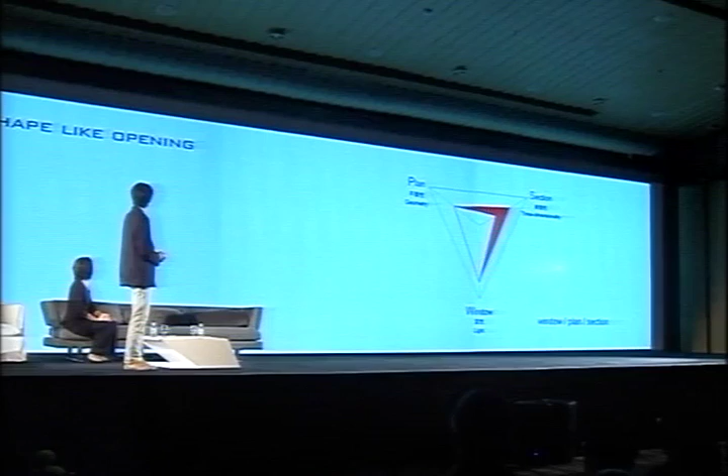And the second method, second strategy we are approaching, is how can we put the window as an architecture. Plan and section, we designed separately, but we would like to think of them at the same time. Plan and section and window.

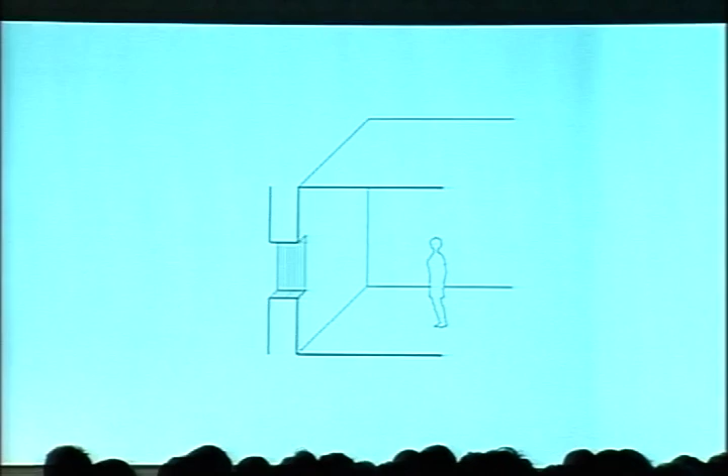And when we look at the Romanesque church in European countries, or Le Corbusier's, for example, the Ronchamp church, Notre Dame, we think this part of the window, the quite thick wall of the hall, would be the window. This part is the strong reflection of the light. And we think if this part gets bigger, you can feel more natural light.

And this part becomes larger like this one, becomes the architecture scale, and finally it becomes the structure or the architecture itself. So if we use this kind of technology, window and section and plan, we design them at one time, at the same time. This is the second method we are approaching.

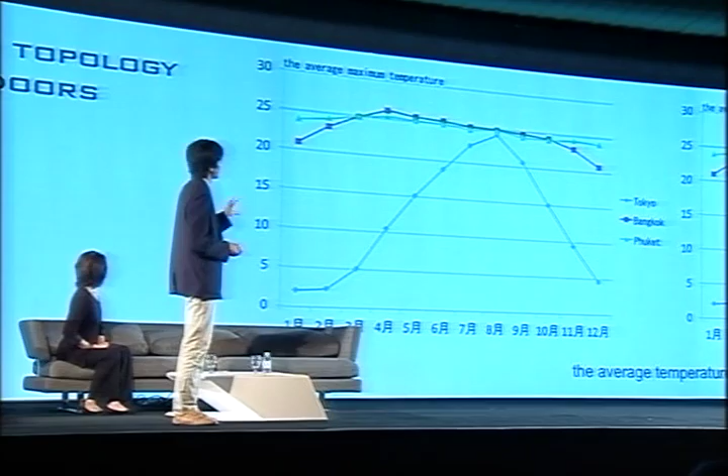And another thing, this is the graph of the Bangkok average temperature and Tokyo or Osaka temperature. This one is quite high through the year. And in Tokyo or Osaka or in Kyoto, we have the higher temperature in the summer, and we have a very cold winter.

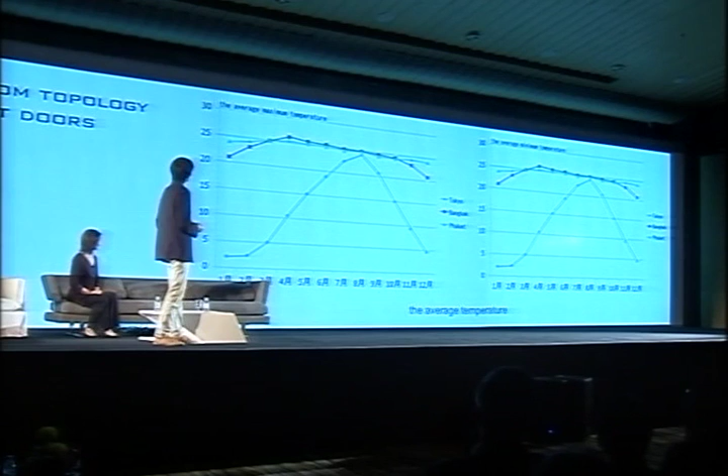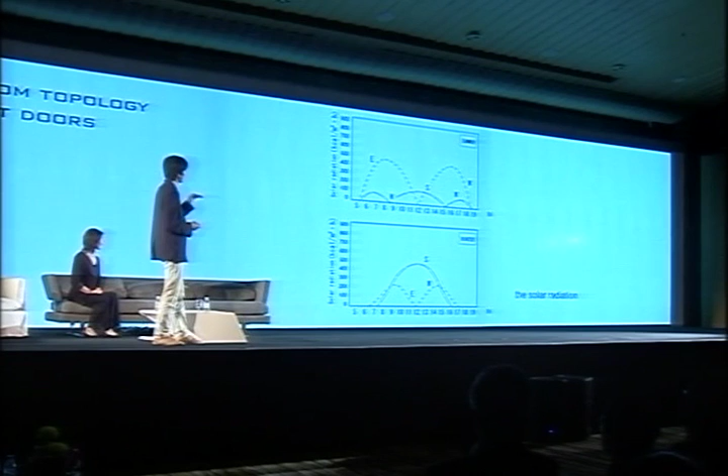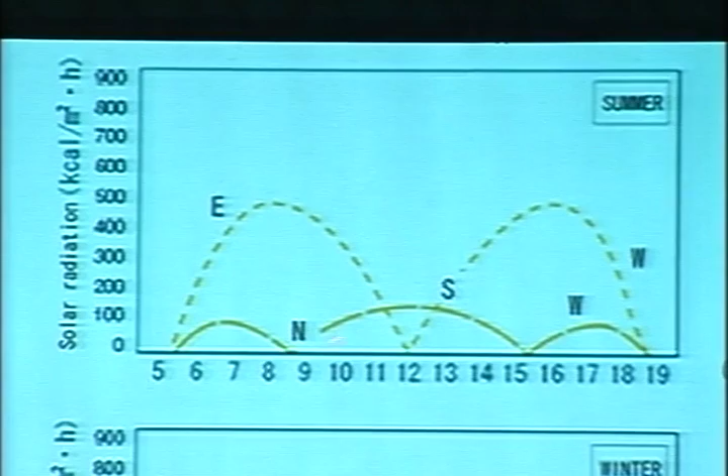So another context, the weather context, is different, and we have a higher latitude. So on the south side, in summer, the south side has less solar heat radiation, and in winter, the south side has the most heat energy.

And east side, in summer, we got a lot of energy from the east and west side. So if we opened the south side with the glass facade, with the small canopy, we use the solar energy most effectively. So if we designed the small opening to the south side in Japan with a high insulation, we can design the one-room system for the architecture.

So that's the third method of our approach. So let's see the first project. So from here, I will show you some of our projects, called Double Window House. This is the site in the middle of Kyoto city. It's a very traditional city, where we two brought up, live, and work now.

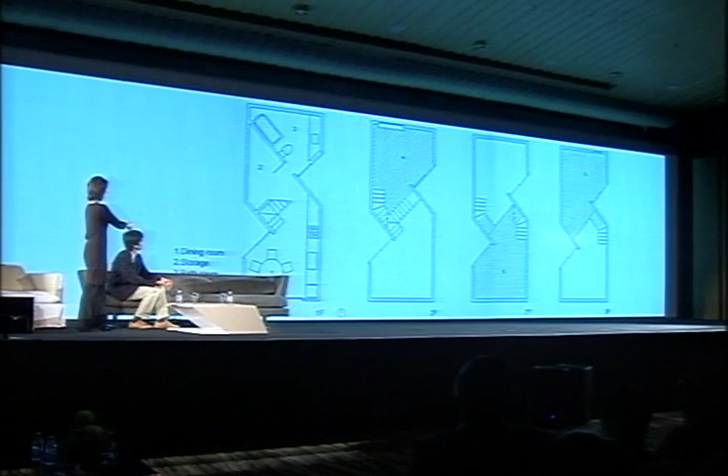And the site was very narrow, as the building area there is only 28 square meters. So we had to select this one-room space, but we put these triangular courtyards, two courtyards in this way. We wanted to make this one-room space not one room, but articulated space.

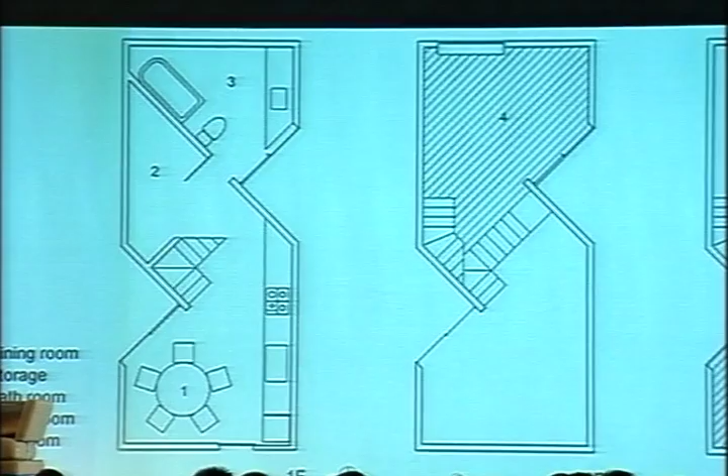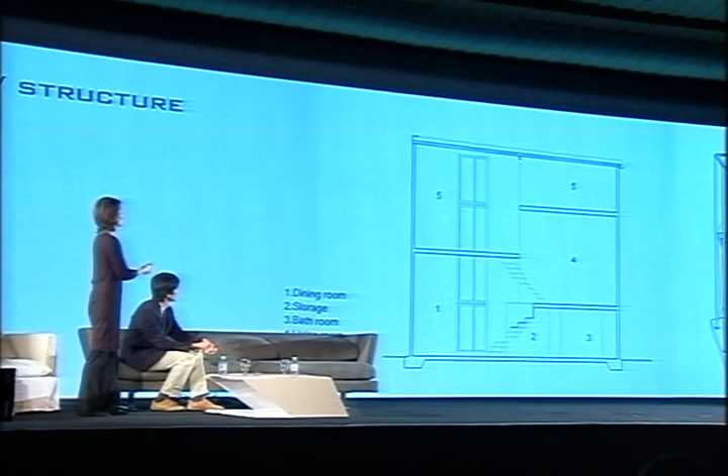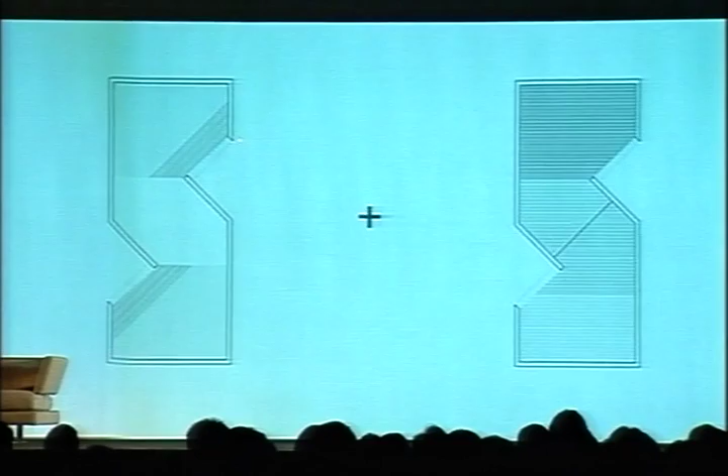And along with those triangular courtyards, we set like this, skipped floors. With these two operations, we made this one-room house. And inside this one-room house, because we put all the windows facing to this courtyard here, first window here, second window here, it's facing opposite side, so it lights this part and this part equally. But still, those floors are skipped.

So the amount of the light is different from first window to second window. So when we plus these influences of light, it became like this. It's like this. Window plus skip floor. So this is the photo. There is no window other than this part and this part. It's in the middle of Kyoto City, meaning many traditional townhouses were stuck together.

This is the dining room. Just when you get in from the entrance, you will face this first window, and you watch straight, you will see another room up onto the second level. This is the living room, but the living room with another second window here. This living room was always lighted with this second window, so when you step into the house, you will feel the two influences of first window and second window in one glance.

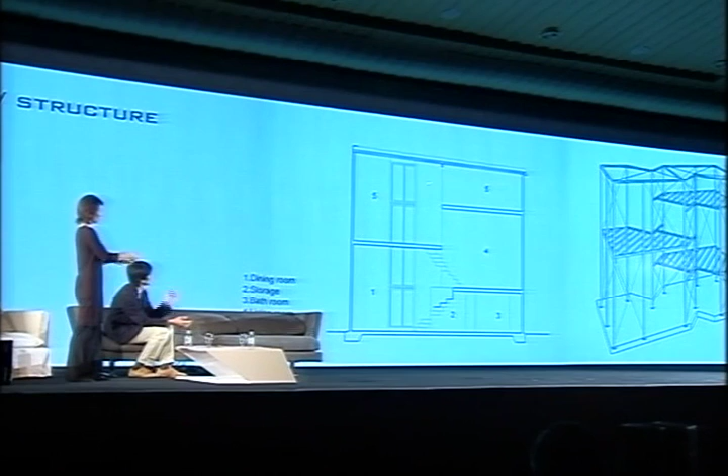And also, this staircase and these shelves are made of steel plate, which means, this is structure, steel structure. It's a very tiny house, so we put very thin columns, 100 by 100, like bird cages. And these staircases and shelves made of steel plate are also attached to this structure itself. So these staircases and that shelf are also part of the structure, a kind of.

This is from the bedroom to the living room and also to the child room. So when you go up in this house, the light changes. From the first window, you will have direct light, and from the second window, indirect light. And when you go up the staircase, it changes very dramatically. So in this house, we managed to realize one room, but also very dramatic space.

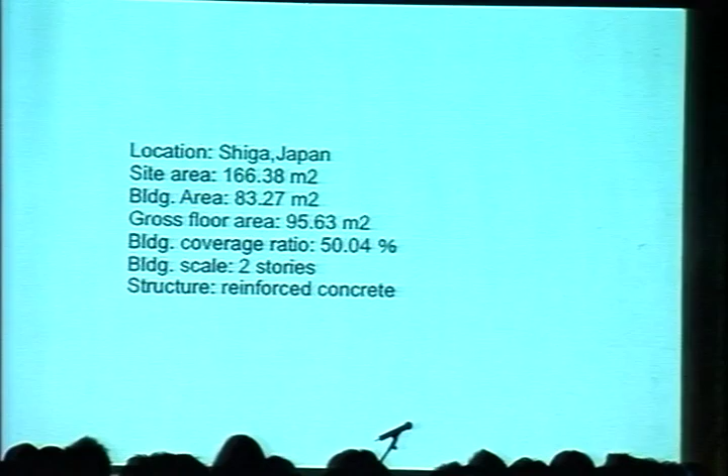So this is the second house, named Hall House, in 2007. This is the site. It's near Kyoto City, but rather suburban side, and the shape of the lot was very irregular. And according to this irregular shape, the building itself is very irregular, pentagonal shape, like this. Then this is a diagram of how we designed. This is the largest building that we could build. We built like this.

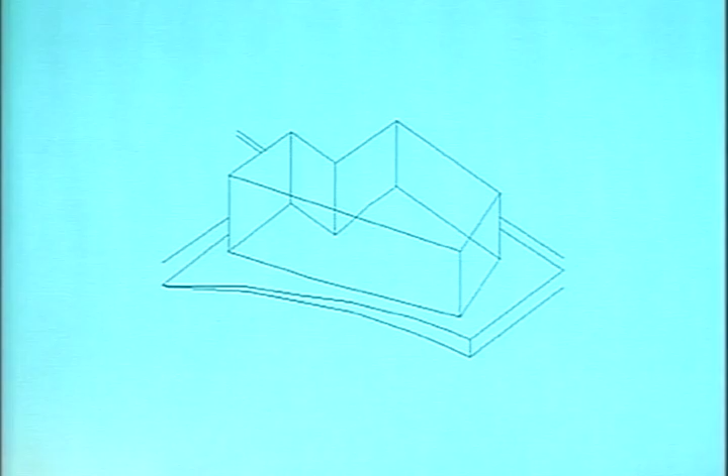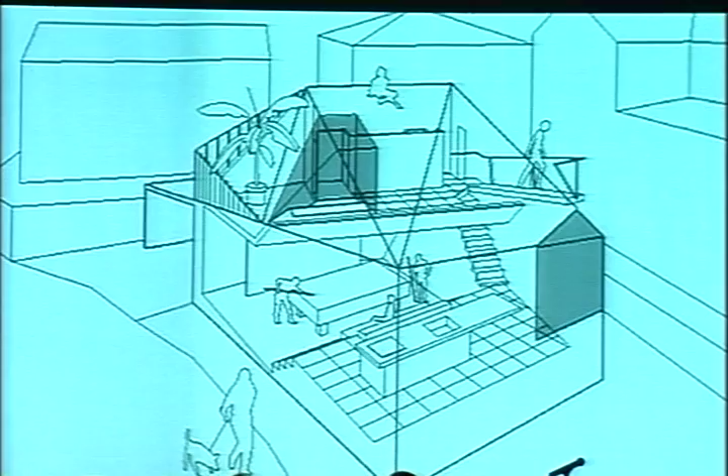And this name Hall House was because the client wants to do billiards inside the house. And also, they want to watch the cinema with the very big screen inside their house too. And they want to enjoy meals at the same time. So you need a hall inside the house. It was a really difficult request for us. So we thought of making the whole space a hall. It was the idea.

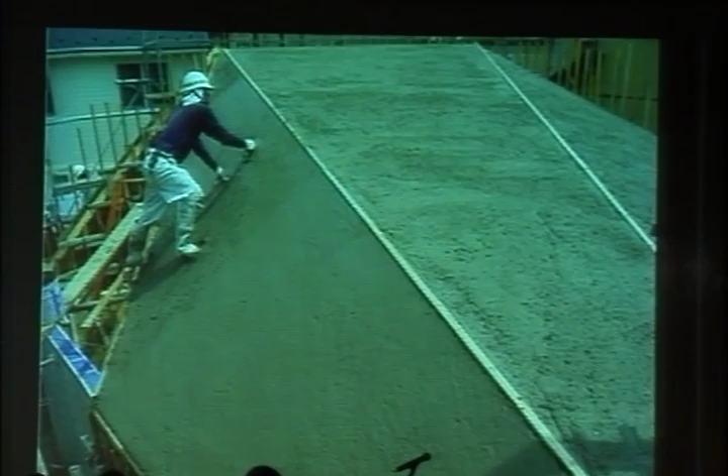And for this hall, the budget was of course restricted. We decided to use this kind of concrete structure, but still it is the monocoque structural system with very thin slabs and walls of 180 millimeters. And when you want to cover this hall with no column, if you bend the roof like this, with thin structure, it will carry this whole hall without column. So we made this house not with a flat roof, but the roof like this.

And for the roof, all the carpenters, how can I say, made them by their hands. So the craftsmanship was very nice at the time. So this is the exterior.

Sorry. And this site has a slope also. So we put the parking lot here, at the lowest part of the site. When you go in the parking, there's the entrance here, and when you step into the entrance, you suddenly come to the billiard hall. This is the hall. And when you go up about 1 meter, there is the dining kitchen.

This is according to the slope of the site. So if you go out of this door, you can go out to the ground. And this is a sofa here. From this sofa, there's a screen here. You can see cinema very vividly with huge sound, and you can see it over this billiard hall.

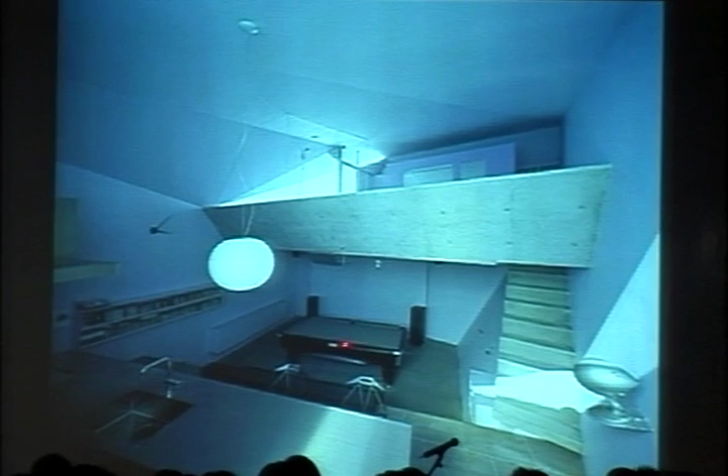That's why we put this chair in the middle of this staircase. So we had to think it over and over again, how to make this billiard hall and this cinema hall coexist. Half a floor up is the dining kitchen, and half a floor up again there is a bedroom and a bathroom. It's from another side. You go up like this, and this is the bedroom.

As the site has an irregular shape, this hall has a pentagonal shape. When you put this hall here, and put the bedroom onto this billiard hall, a triangular space appeared. We made this triangular space into the terrace because there's a nice view here. And this is the biggest window of this house.

From this window, we take in the natural light through this glass bathroom. So the glass bathroom itself is a window. So this is the window influence. There's another window here onto the dining kitchen. This is the terrace. So this is the window influence of the first floor, the window influence from the second floor, and they mix like this inside the hall. It's like this.

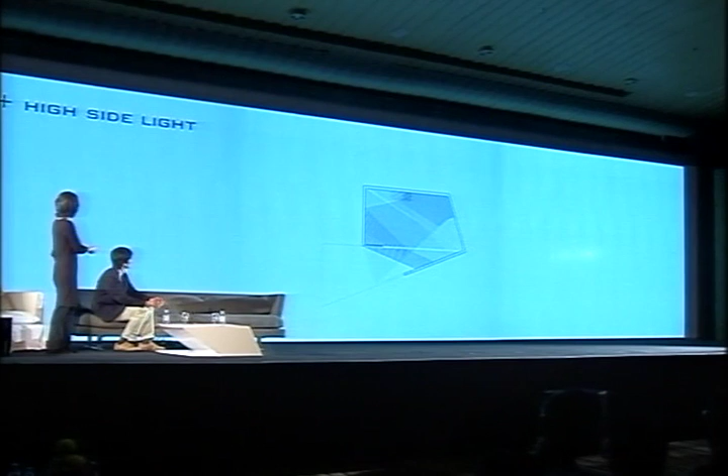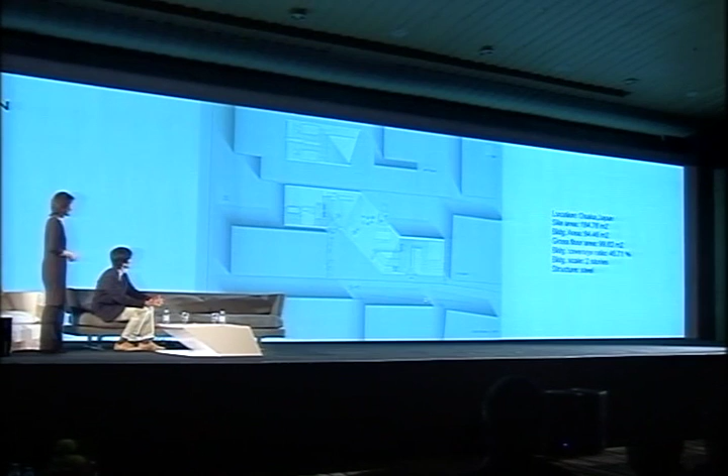Okay, the next one. This is the house named House Twisted. This is south of Osaka, a very small but traditional commercial city. Like in Kyoto, it has very small but old wooden townhouses around. Because the site was this shape, irregular again, we twisted the house this way twice. The client's request was they want to have a comfortable life, but they also want to have the traditional style of life.

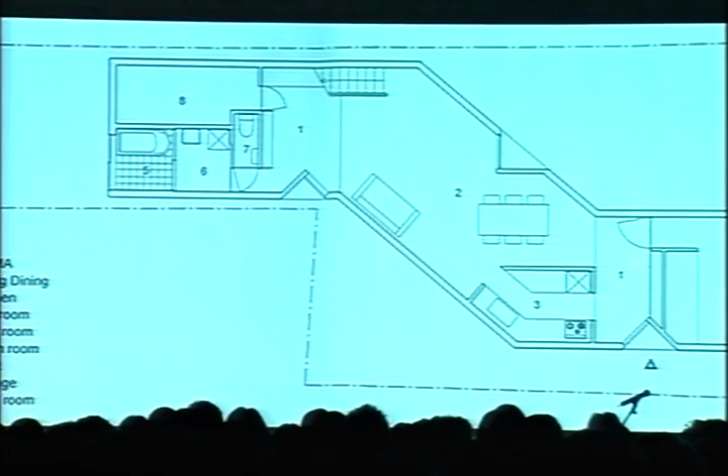So we put two doma. Doma is the earthen floor. You can come in with shoes, and you take off the shoes here, but it's larger than a normal entrance, and there are two of them. They say in traditional houses this doma space was very huge, and the neighbors would come in and give you some presents, some vegetables, and talk to each other. And when the communal festival comes, they come in here to wait for it. So we put two doma spaces here and there.

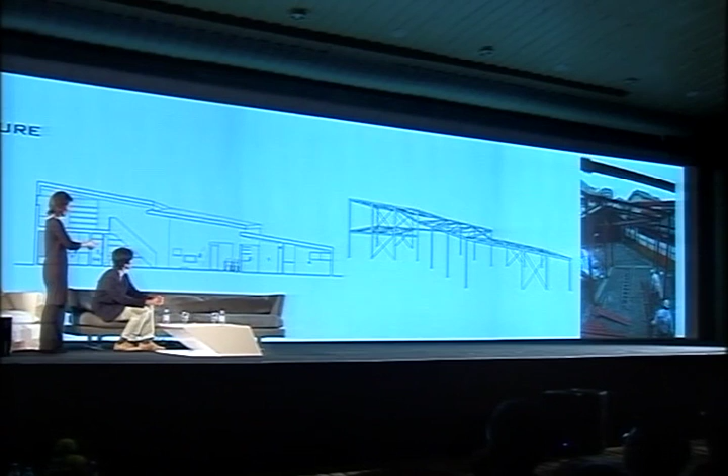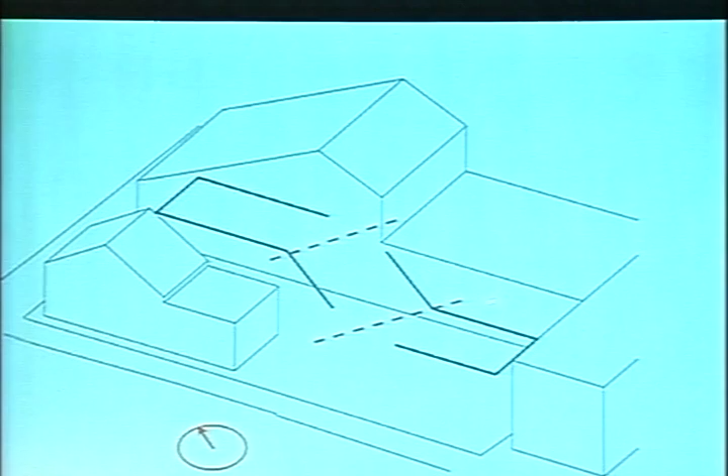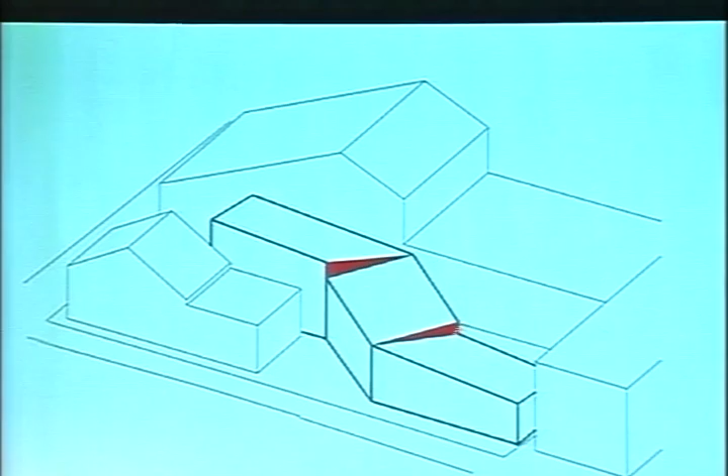Above the doma spaces, we put two high side lights. Firstly, we put the building like this, and after that, we twisted the building into two. At that time, this faces the south side. As Kentaro showed you, the south side is very convenient when you don't want to use much energy to heat or cool the house. So we decided to use this direction for the high side light. These roofs are slanted in this direction, and a high side light appeared here, facing south.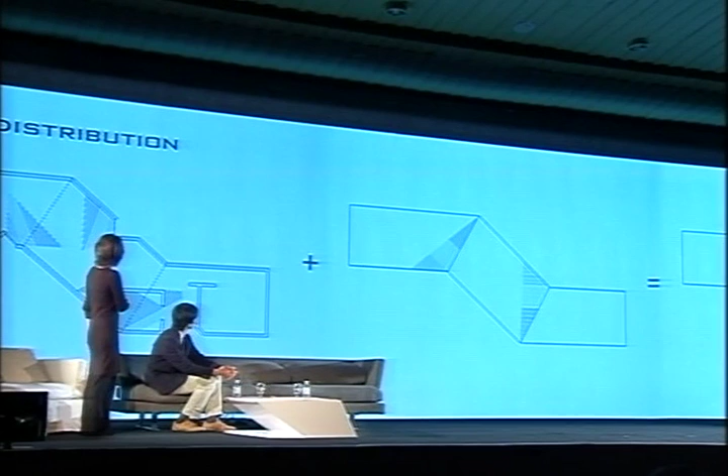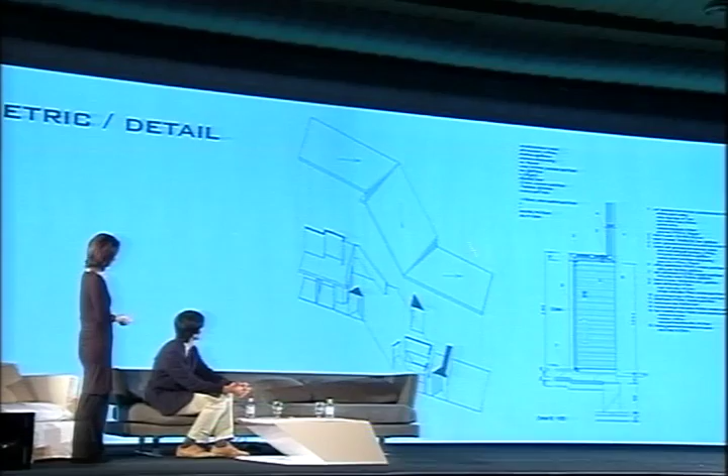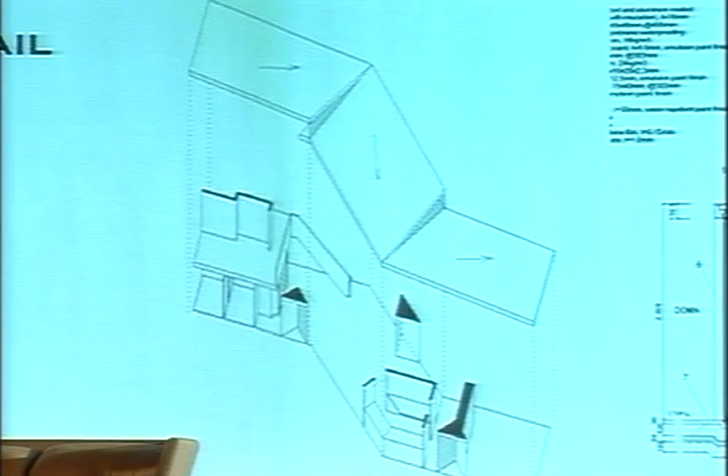So this is the axonometric. This is the light distribution. I have to add an explanation. This high side light operation is a very large-scale operation, too big as a scale. So we added these three entrances: the entrance to the first doma, the entrance to the second doma, and the entrance to the courtyard. We put this 45-degree entrance into this one-room space, and this is the kitchen booth. We mixed in a more suitable scale for human beings.

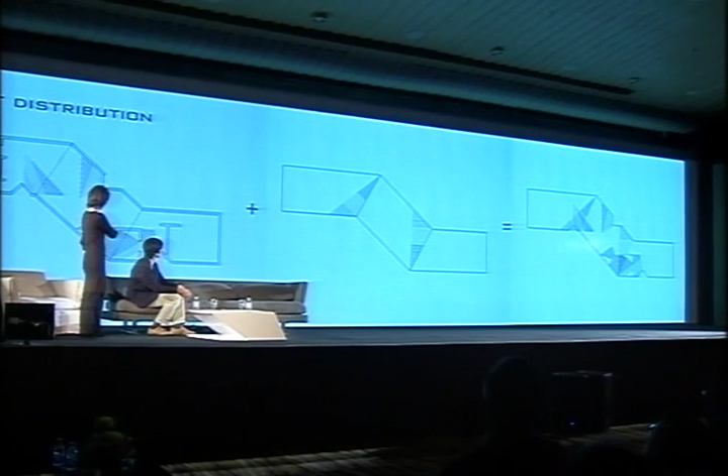And the light distribution became like this. This is the human scale. This is the high side light influence. This is the mixed light distribution.

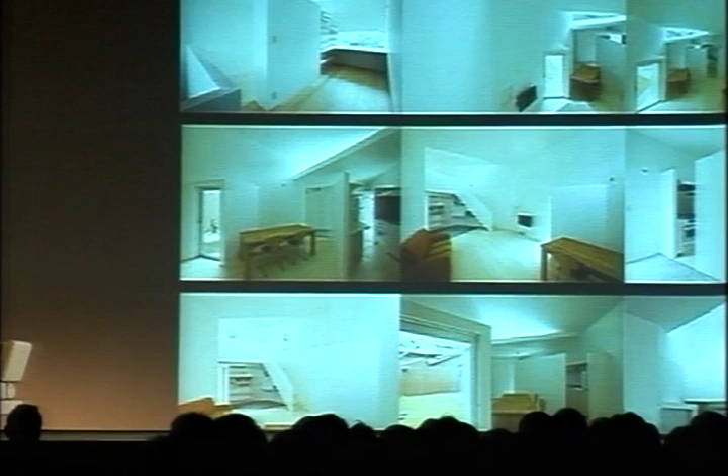But thanks to these two operations, the very big scale operation and the human scale operation, when you change your place slightly, the view you get inside this space changes very dramatically. So the sequence changes from time to time. I will show you.

This is the child room. This is the only second floor space at the end of this building. So from this child space, you can see two high side lights of this building. So you can see the whole building from this child space.

And from the child space, if you're going down the staircase, you can only see outside this house from this point, like this. And there's the dining room, and there's the first doma here. This is the courtyard. And when you're going down, it's like this. So there's the second doma here. And this is the living room.

So this entrance serves also as a very small window. All the light inside this space is coming from these two high side lights. It's enough for daily life. So this entrance serves only to go in and out, and as a small window for the courtyard. It helps us to maintain the climate inside this building very well.

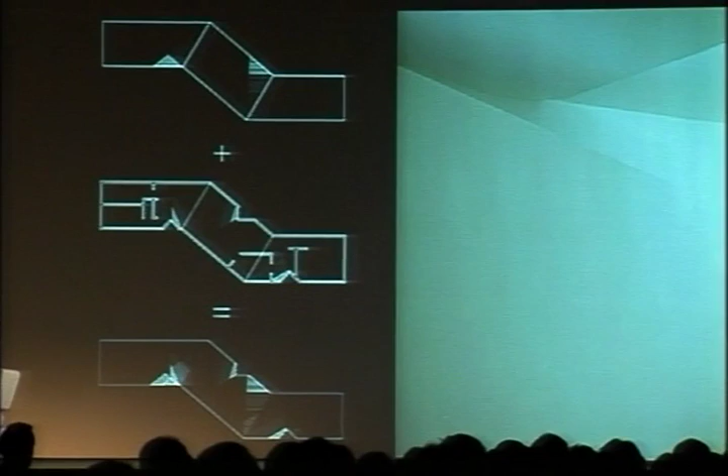And New Kyoto Townhouse, this is in 2010. It's also in Kyoto, but it's a more central area. This is the castle, a traditional castle. So around here, it's very severely restricted to build modern buildings. And also, in this area, very traditional townhouses form these vacant spaces.

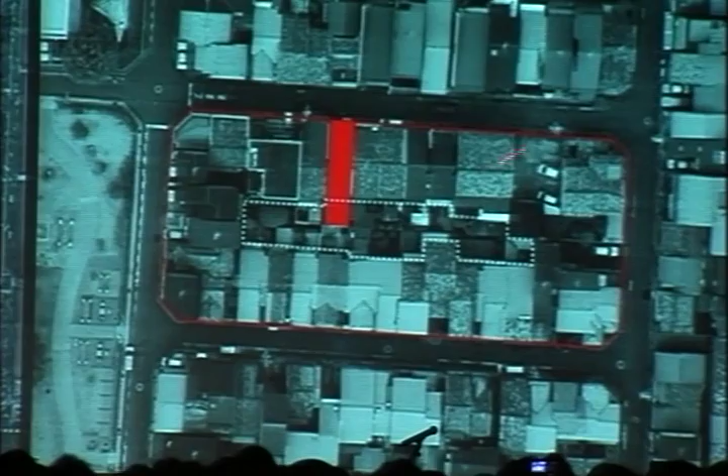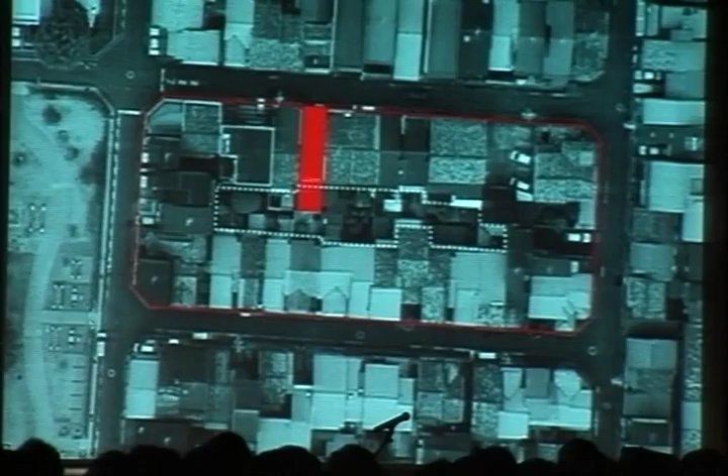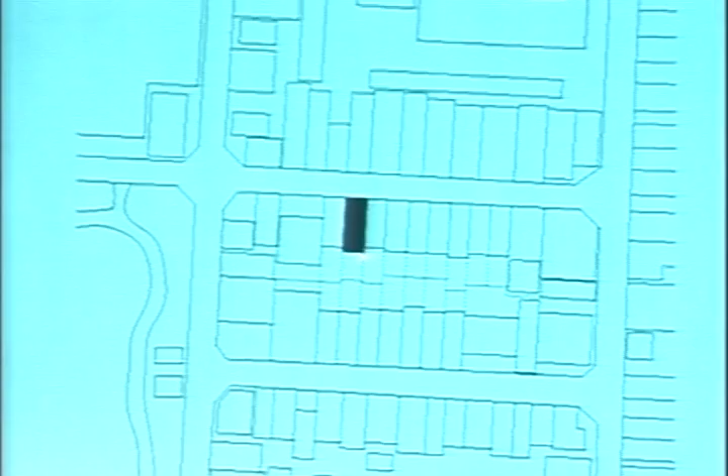All the townhouses face the road, and each house has its vacant space. And as a whole, they make the open space to the city. It lets in the sunlight and also the ventilation. So we decided to succeed also the form of the building and this vacant space at the back of the building.

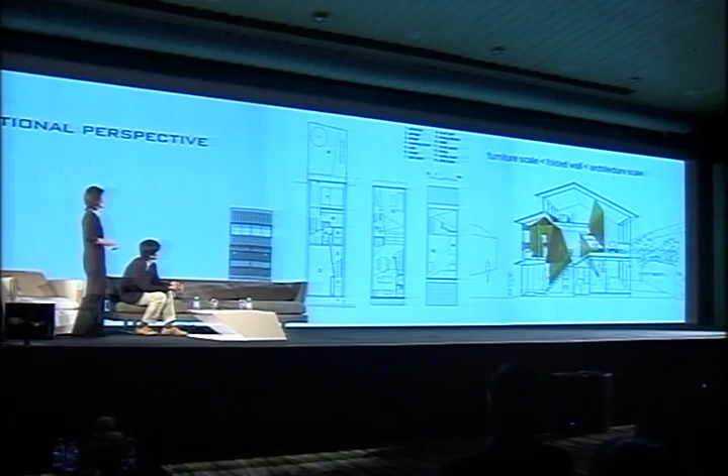So, by the restriction law, we had to imitate the traditional townhouse. So it's like this, and also the volume too. But inside, we must have many rooms suitable for modern life, along with parking. So we put all the small rooms piled up in 3 floors like this, and shifted them.

And we gave these partitions. Normally it has straight partitions. We gave three-dimensionally folded partitions. With these partitions, we made this house one room, still a very articulated space.

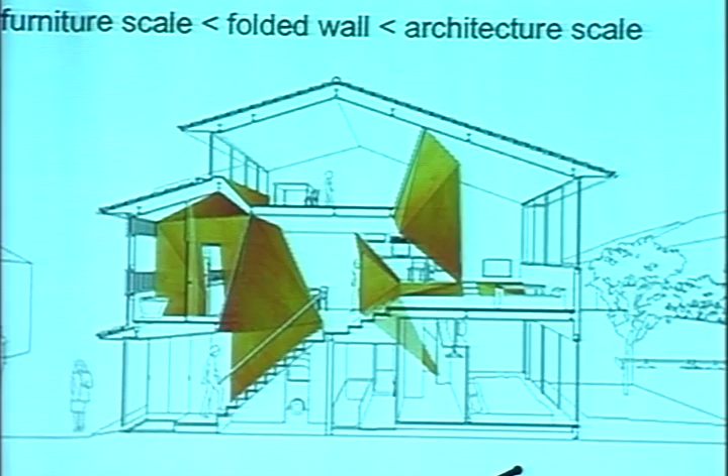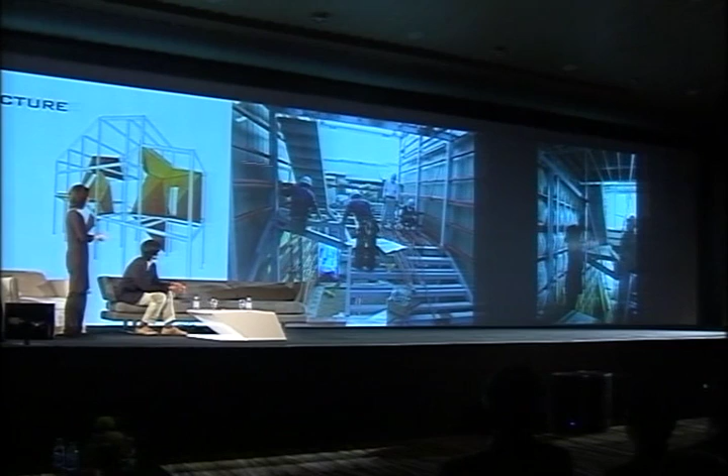For this house, we also used this steel structure. This steel structure allows us to connect all the space from the 1st floor to the 3rd floor. And inside this steel structure, we put LGS, light gauge steel. It's not structure, but to make these triangular partitions. So, like this, we realized this kind of very irregular shape.

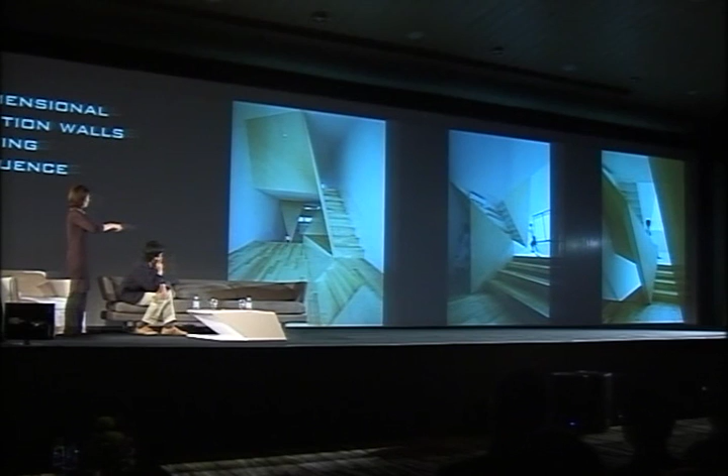Facade. It's like this. These are old traditional townhouses. It looks very similar. And inside it's like this. It's from the living room. There's the entrance. And when you get into the entrance, there's the first staircase.

You go up directly because you have to park the car here. And you don't have any room without a staircase. So you go straight up to the living room, and there's another staircase to the child room on the 3rd floor. But there is another staircase to the 1st floor, on the back side of this partition.

I will show you. If you shift your eye point, it's here. It's from here to here. You can go down to the bedroom. So there's the dining room there. So from the dining room, you can go down to the bedroom.

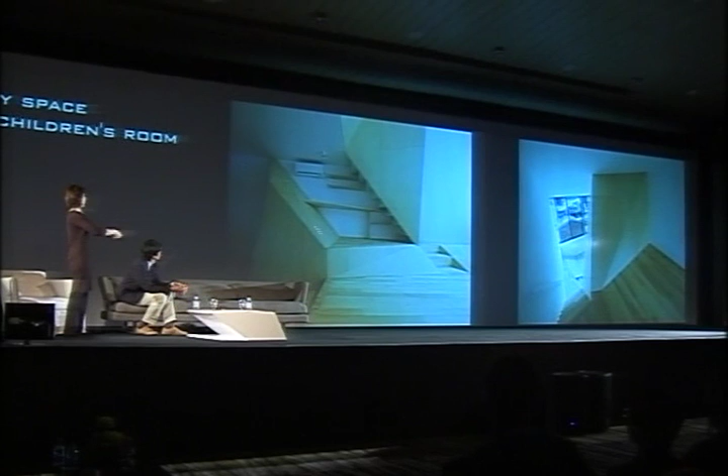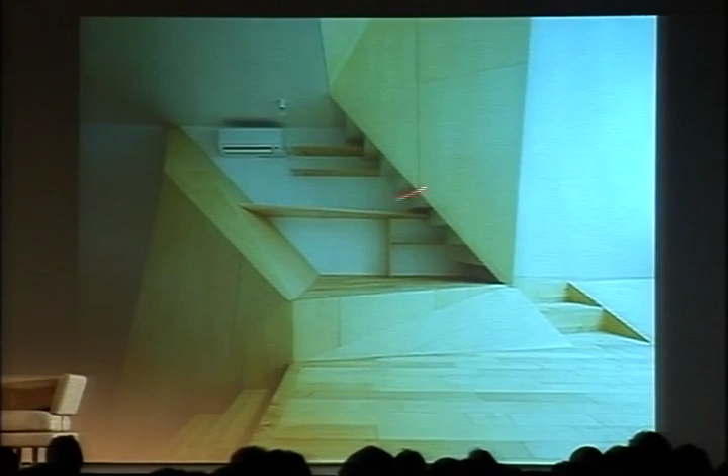This is the study here. It is between 2 staircases: the staircase to the 3rd floor and the staircase to the 1st floor. So we use all the space like this because all the volume was limited, and we had to put the whole program inside this volume.

So this is the view from the second staircase from the bedroom. This is the bedroom. And this is the first staircase from the entrance to the road. This is the first floor bathroom. Night view.

And we have a movie here, as it's so complicated. So please watch this. This is from the entrance directly up to the living room. It's like this.

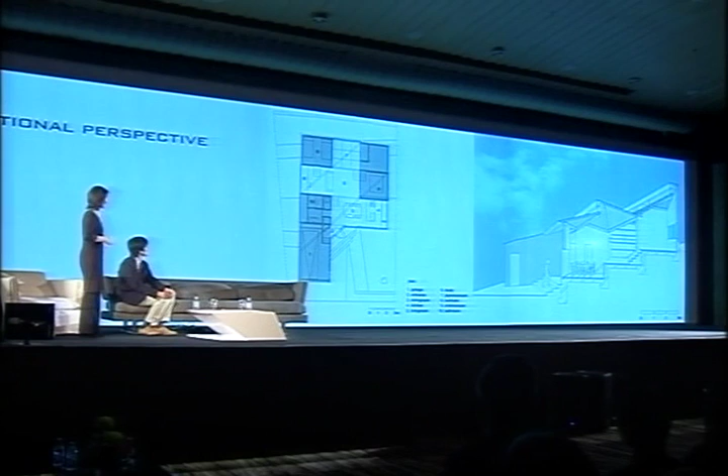So we make these floors, skipped floors, and we put the roof just onto these floors. 3x3 grid, steel structure, very small. It is first level, second level, third level. And onto this planning, we put this shaped roof.

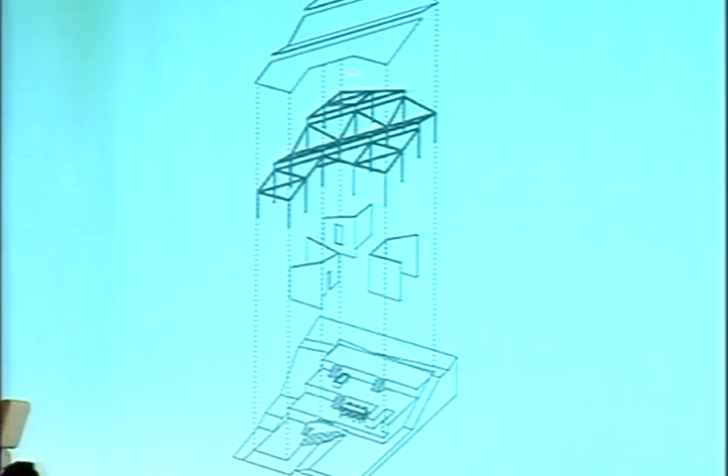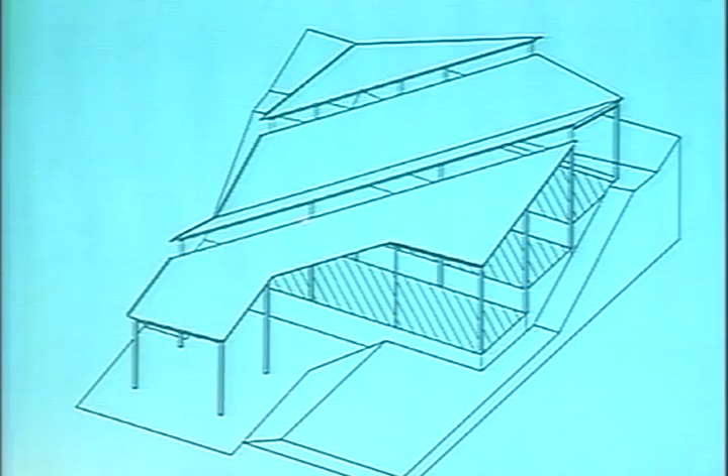Like in House Twisted, we made use of the direction south. This is facing the south. So we made the high side light here, and after it, we waved the roof so as to drain the rainfall. It rains a lot also in Japan, so it's a big issue. So it becomes like this.

And also there's light distribution. It's the light from the high side light, and it's the light from the windows of the outer wall of this house. It's rather small windows here, because there are houses here, and there's a road. And the distribution of light is like this.

So this is the picture of the outside. There are two high side lights. Inside it's like this. So with these, firstly, 3x3 grid of the structure, and the difference of height, about 1 meter. And there's a 45-degree high side light.

Each operation is very simple and rational, but the overlapping of these operations make this space very, though not monotonous, varied. Various lights coming in and various places to hide.

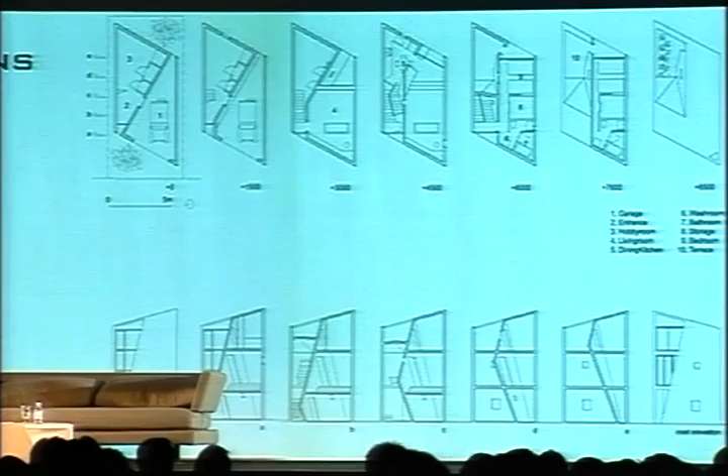We folded one wall in a central one like this, and the facade would look like that, with people on the street walking at this angle. Anyway, it's under construction.

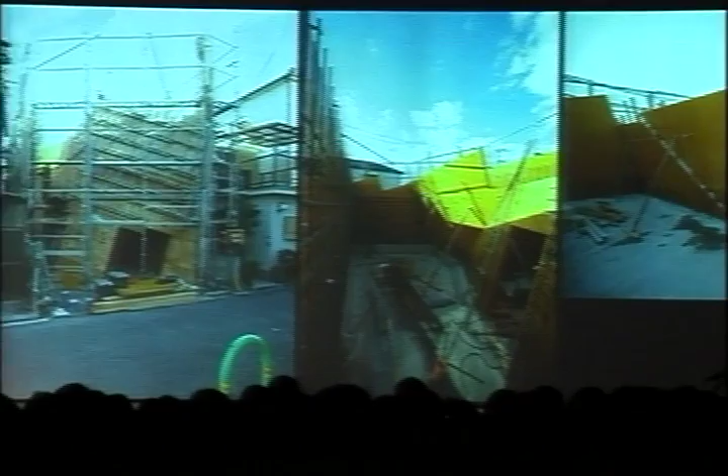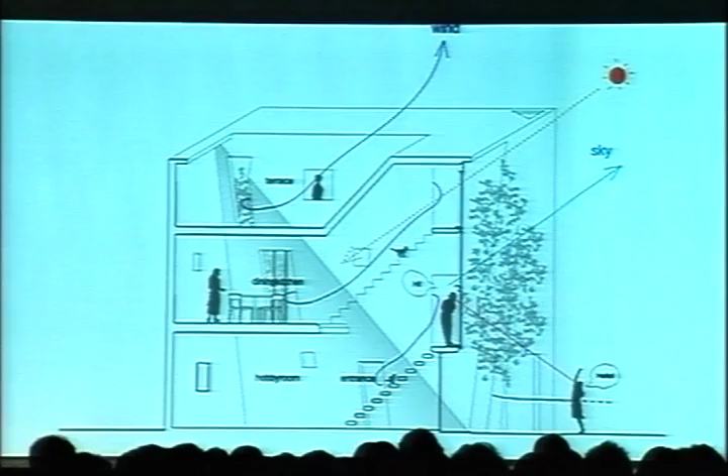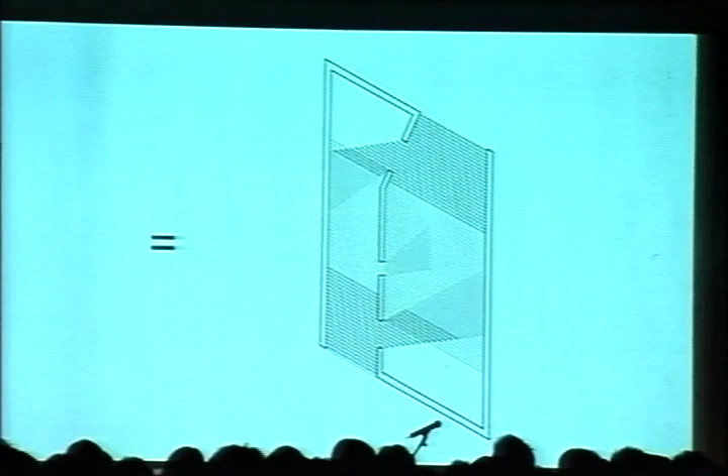And also with a skipped floor, we make all the rooms a different shape and different ceiling heights. And also in this project, we are thinking about making not so big windows, direct light, and also you can find the indirect light reflected off another wall. It's a kind of buffer zone.

So this shows the mixture of direct light and indirect light. Like this, direct light with indirect light, you can see the mixture. This is the exterior. You can find the window, which is divided into the rooms. And on another side of the building, you can see the front yard with a small green area.

And this is a carport on the ground floor. You go upstairs, like this one. You can find this indirect light through the window. We control the area of the window size using this kind of folded wall. Not too big, not too small. You could see the indirect light here and, to the third floor, the staircase.

And you can see this picture from the dining room to the living room. From the dining space, you could see another window to the east. And you can see from the third floor to the kitchen space. And this is a picture for the cats.

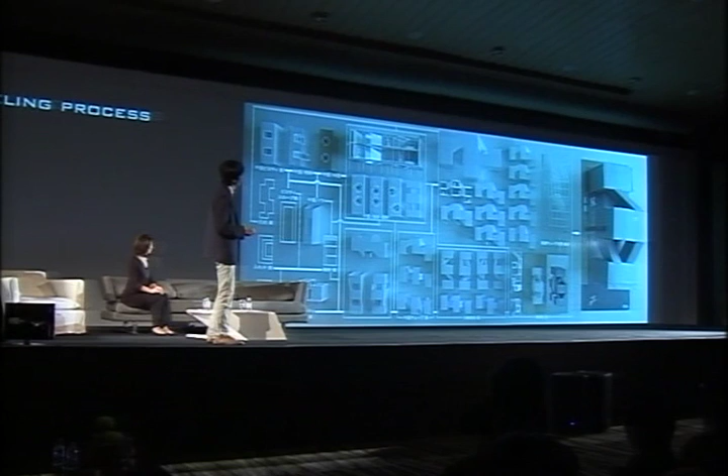If we designed another staircase or circulation on the house, additional staircase on the house, we could have a loop circulation. We could have more choices to get from room to room. So we designed another staircase on the third floor to the second floor, so you have the loop like that.

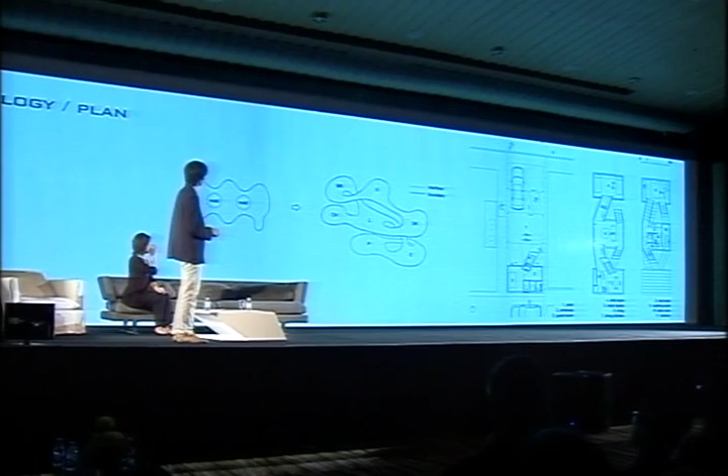From the first stage, we have a courtyard house like that. We designed like that, but anyway we went through something like that, and finally we designed this shape with discussion with the clients. So we could have the loop like that, so you can approach like that and like that.

In this circulation, if the husband quarreled with the wife, they hide - they try to go out to the city without meeting the wife. And also the children have more choices to go out.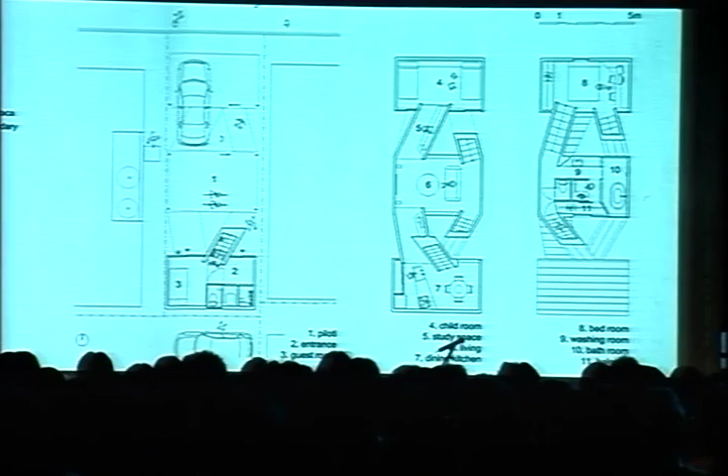And the volume itself is floated with the piloti. These tubes - some tubes have function, and some tubes have the staircase. The section would be like that.

This is also steel structure. The structure - this tube volume itself becomes the structure. So all the volume is like one tube, and each tube becomes a structure. Because of this large structure, the column becomes very thin - it's not a pipe, but a solid steel structure with a 65 width.

And these tilted columns are for the earthquake horizontal resistance. So you can see this sectional perspective like that.

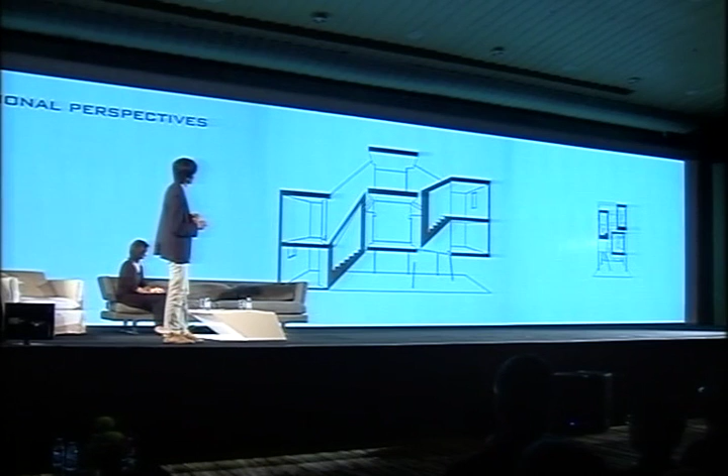So it's like an animal, or something different from a machine, or not from architecture. But you could see this natural large window light with the tube. The tube itself doesn't have a window, so we could see the blind tunnel to the indirect lights. So with the tube it becomes like that - you could see the very depth of the distribution of lights.

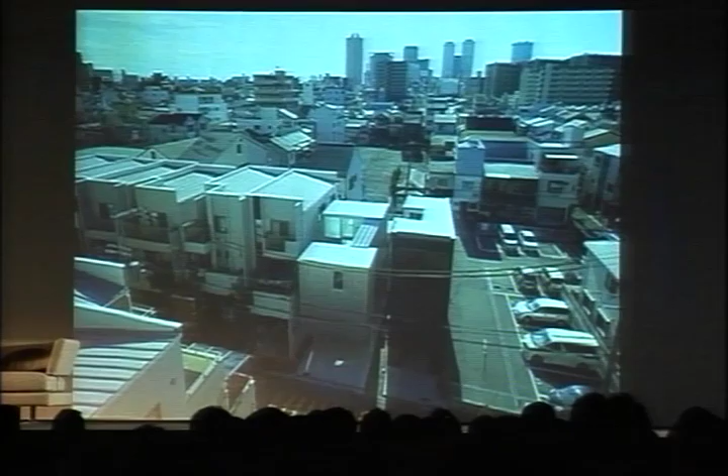So this is the house. The column is very thin. So the program is a house, but it's like almost a building, big architecture. So you can see the 65 millimeter column, the entrance, and you could have the sequence or continuance of the circulation.

It's like a backyard of the city. From the living, you can find out the streets. Go up to the bedroom, and from the bedroom you go upstairs on the third floor for the sanitary. You can see the living and the third floor.

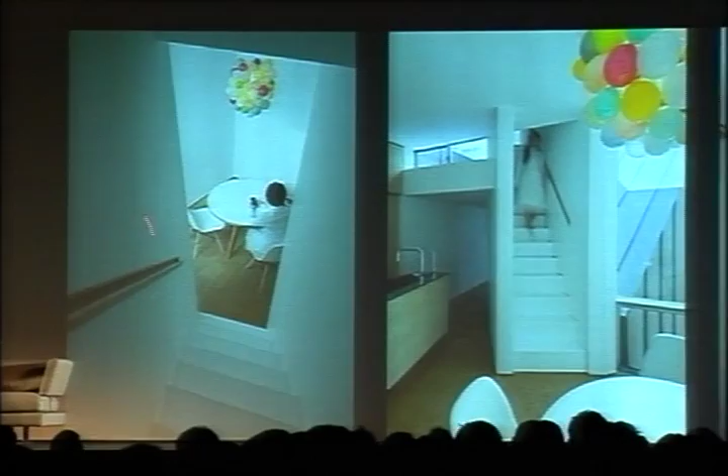The bathroom, sanitary. And you go down using another staircase to the dining. There's the dining space and the kitchen, and you can see the dining space, and you can see the legs of the street walking people.

If we would like to design the courtyard house, just put a high wall in between the neighborhoods. But we use this kind of three-dimensionally stacked structure for communication with the neighbors. You could see the streets, you could see the rebounded lights from the neighbors. So this is the house.

It has not so important privacy for the children in a younger generation, so you could see the atmosphere of the neighbors. And you have half privacy to the living room, and the sound comes like that. From the children, you have some secureness, privacy, but you are connected to the living room.

This is a children's room to the living room - this has all the function. So you can see the neighbors, and you feel the neighbors are in their house, or they started to put on the lights, something like that. So half privacy with some communication - indirect communications happen. This kind of three-dimensional structure gives us that kind of relations.

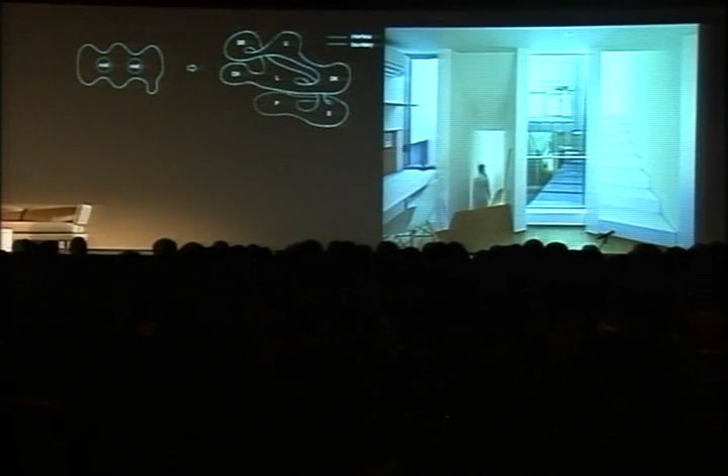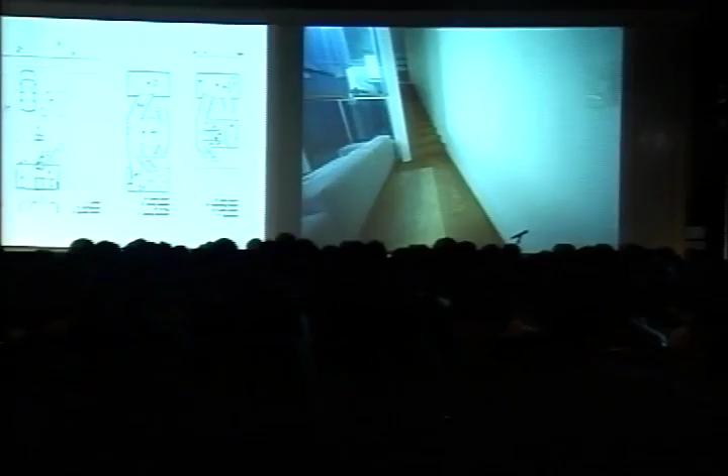So we have the two courtyards here, and we also have the movie of this complicated space. From the living room, you can find the bedroom here.

You can see the first courtyard, and to the third floor, from here to here, you could see this, to the bedroom, and another staircase, which is very steep.

So you could see the dining room here, and another corridor to the living room. So you can find a person in a piloti, and to the children's space.

You can see the pilotis.

So this is one project where construction has just started, in a Buddhist sacred space for the World Heritage in Koyasan, which is south of the Nara prefecture.

We are designing with a very small budget using the 2x4 wooden structure system, which is an accumulation of very thin beams. We could have a space like that.

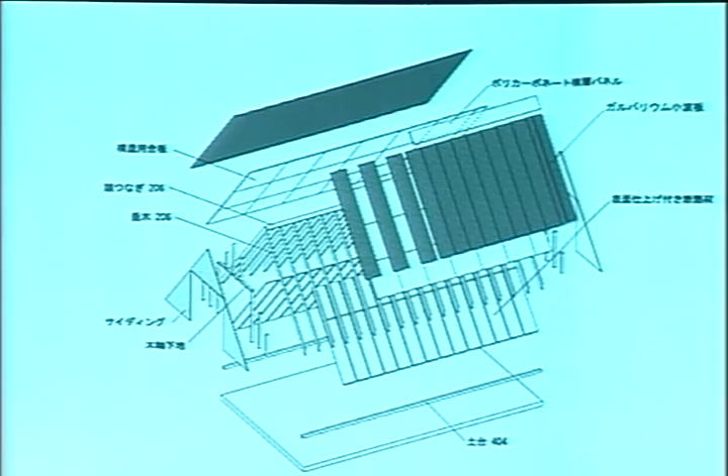And with a small amount of concrete, they can build it by themselves. We put the drawings on my website, and everybody can use them, and some architects in the Tohoku area got recognition and can build this project.

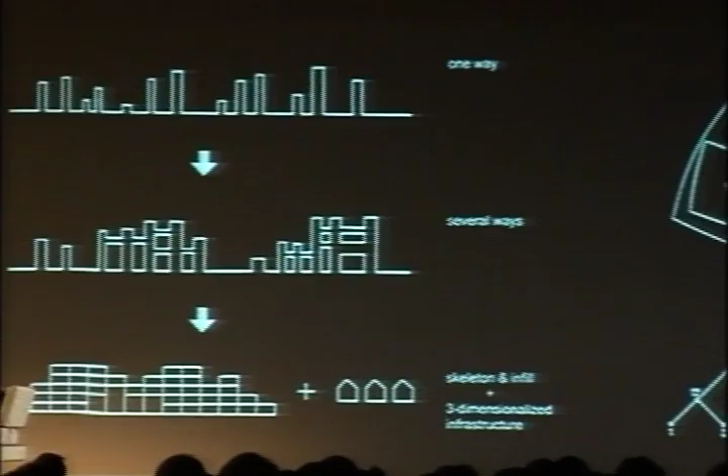And this is the final project of a kind of big project, which is not intended to be built, but is like a metabolist theory. So the cities, with this Matenro or building system, become connected like this—we could have more convenience and more information.

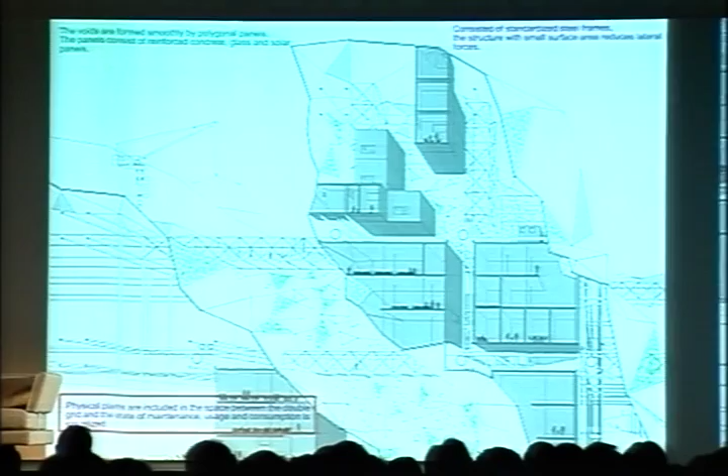And we designed the structure with a three-dimensionally floating infrastructure like this. This is all the housing or the town itself, designed like this. Within these structures, we could maintain the infrastructure.

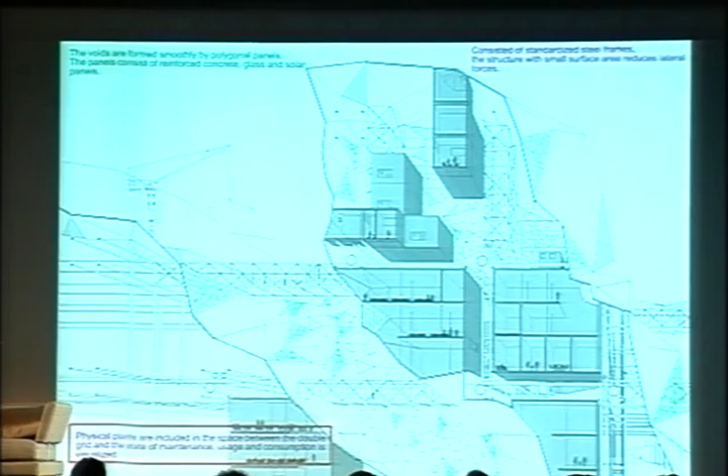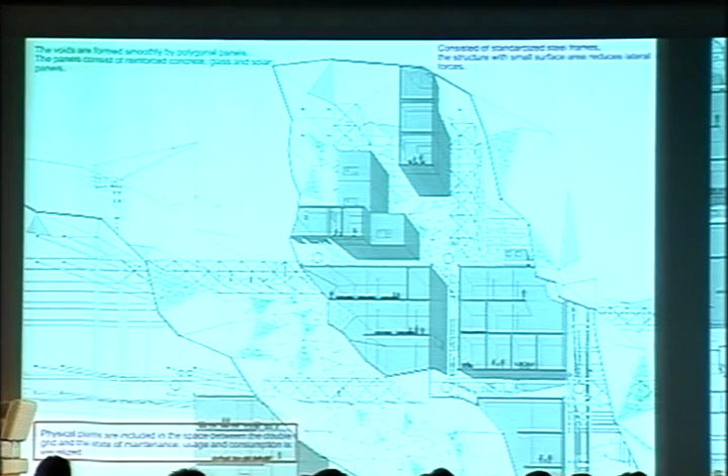And if we put that kind of steel structure, every carpenter can design the wooden infill. So if we first put the skeleton steel structure with waterproofing, fireproofing, and also flood-proofing, everybody can join this kind of project—even the carpenter can build it themselves.

And if we design with new technology like solar heat panels or new energy-generating systems, we can design that kind of slightly energy-saving city.

So this is also another under-construction project. After the big disaster, we are thinking about how to adapt the wooden structure again. We are concentrating on steel and concrete structures, but a more sustainable project would be the wooden structure.

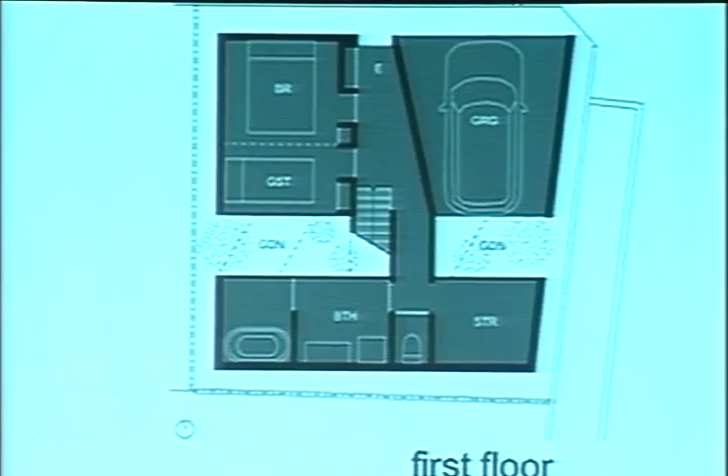So we designed the project, Digging the Sky, adapting this wooden structure like this one. You can have a staircase like that, but you can feel the city atmosphere from here. So you could have some communication with the city, and also have your own private light from the sky.

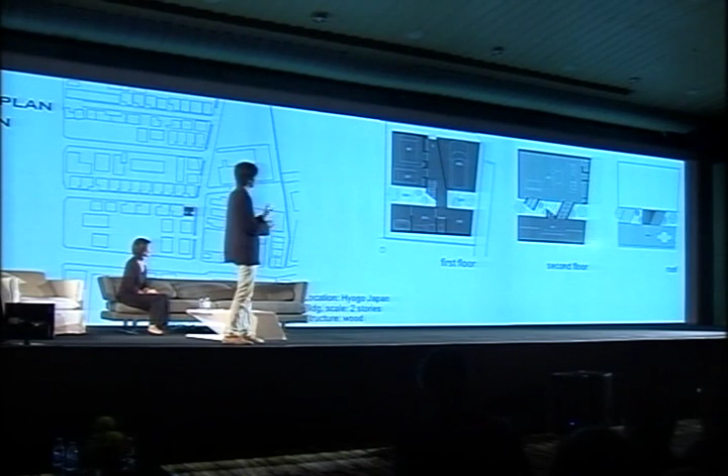So this is also a half-court house project. The tubes are three-dimensionally connected with the rooms, like digging into the sky.

So this is now under construction, and the Japanese carpenters are trying to connect these beams three-dimensionally, and it's very hard to adapt, but they managed to do it with our drawings.

So we are designing that kind of method based on the clients' requests, with this one-room topological idea. So we could try to make new uses, new activity in the architecture. Thank you very much.